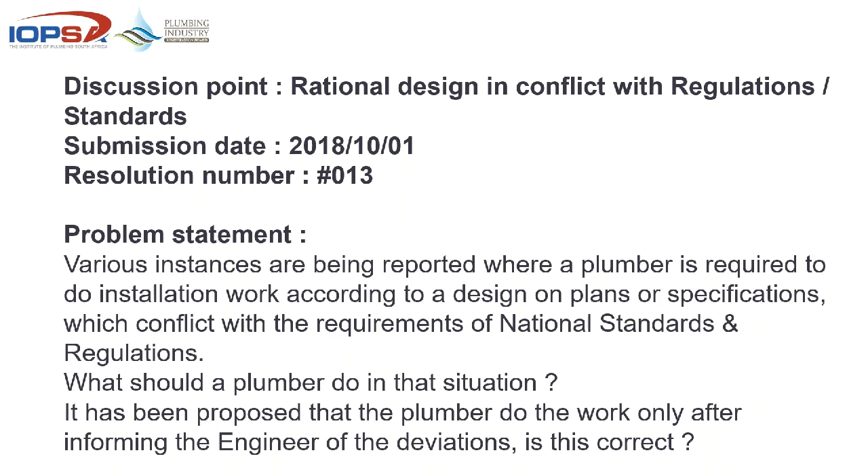So let's have a look at this problem statement. Various instances are being reported where a plumber is required to do installation work according to a design on plans or specifications which conflict with the requirements of national standards and regulations. What should a plumber do in this situation? It has been proposed that the plumber do the work only after informing the engineer of the deviations. Is this correct? So let's have a look at what the requirement was.

Can a plumber be allowed to do a water supply or drainage installation in accordance with a rational design without verifying that it complies with mandatory national standards and regulations? Should a plumber be required to evaluate a rational design and inform the engineer of any discrepancies regarding the mandatory standards and regulations? And are there any deviations that could apply?

If I could just pause on point 2 for a second - you'll find that most competent engineers would be able to work out or do calculations on water to the last drop, could be on any subject, but the point is that they're not a plumber. The standards and regulations that we look at are something completely different to what they study and apply in their everyday trade. So please note, this is not bashing an engineer or an architect or whatever. This is something we need to consider when you do bigger jobs, more complex dwellings, or a triple-story house that needs plumbing done.

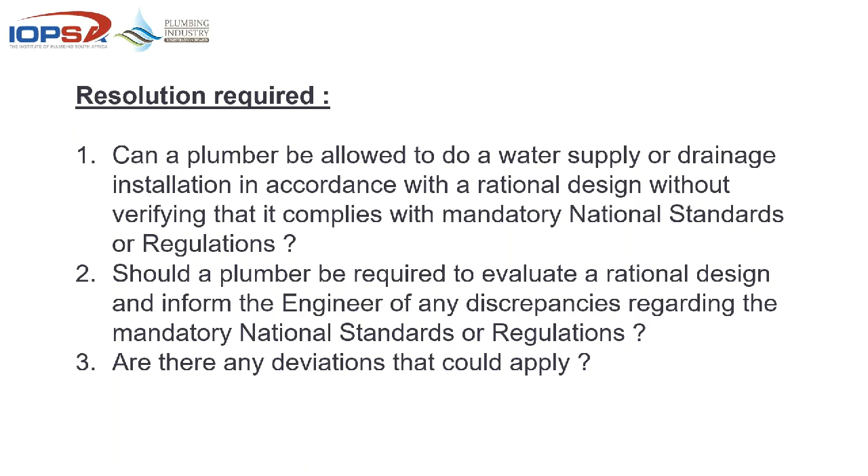Bear in mind that the engineer and the architect studied in a completely different field than what you did, so sometimes we just need to touch base and make people aware of what's actually happening. When it comes to reference documents and standards, we're going to go to the National Building Regulations, Part A, P, W, and XA from the one document, and then we look at 10252 Part 1, Part 2, 10254, and 10106 briefly.

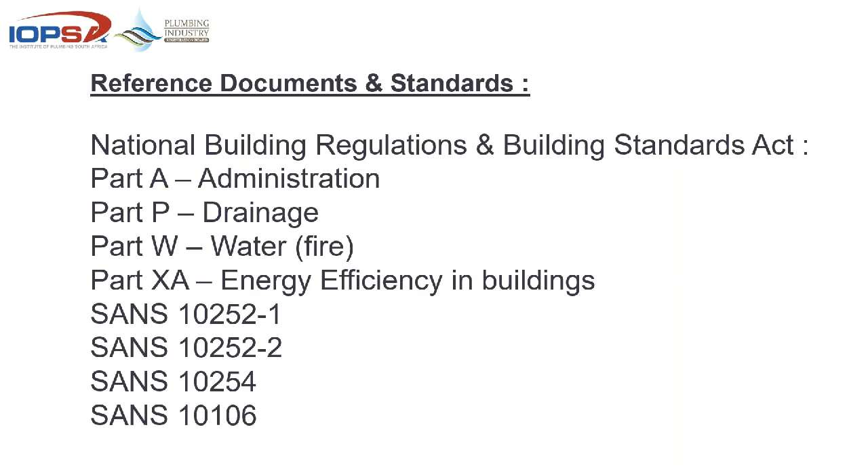When we look at Part A of the application of the National Building Regulations, it says that the requirements of the National Building Regulations shall be complied with by adhering to the requirements of all prescriptive regulations and satisfying all functional regulations by adopting building solutions that comply with the requirements of the relevant part of 10400. So in any of the above ways, you can actually just say that whatever's being done comes straight from the book, and that's how we get to it, and that's what was done.

The other option is reliably demonstrating or predicting with certainty, to the satisfaction of the local authority, that an adopted building solution has an equivalent or superior performance to a solution that complies with the requirements of that relevant part of 10400. We've all heard the term that a rational design needs to be equal or better than the actual standard. You can't be worse off.

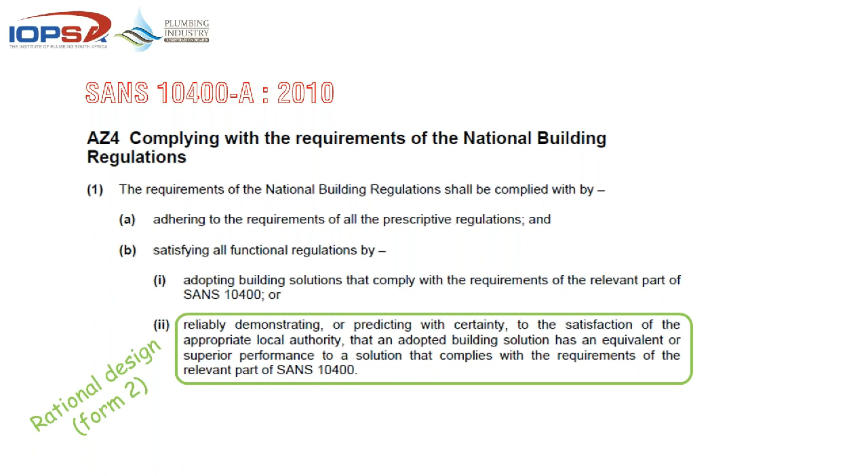So for that rational design, the engineer will get appointed on a Form 2, submitted to the local authority, and this being the first part of what was done beforehand - not once the job has turned out to be something no one can sign off, and you run to an engineer.

Not going to worry about the definition, but basically architect, engineer, natural science or geologist as we know them - there's a requirement for all of these guys that if they are registered in that category, they can do these designs and assessments. I'd like to point out point 3: an approved competent person who satisfies the requirements of sub-regulation 1, which we've just read, in terms of sub-regulation 1(b)(ii), in respect of a system - in other words something, drainage, water, fire, whatever system, measure that was put in place, facility, parameter, or installation.

And here comes the crunch - shall inspect and certify upon completion, in accordance with the requirements of A19, the construction, erection, or installation thereof.

As far as the local authority is concerned, that is basically a Form 4. He signs a document to say that the system or the whole design, the rational design that he did, has been inspected, and he'll certify upon completion that it actually complies with the requirements of what he designed. So it's not for the plumber to get involved with that at that stage.

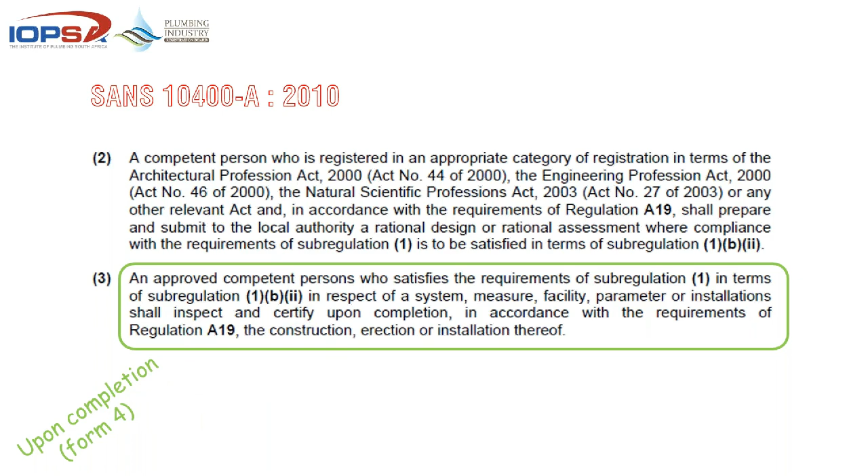Important to note, while we're in Part A, when a building plan is submitted you've got 3 options as far as drainage is concerned, bearing in mind that water comes from 10252 Part 1. So as far as the building regulations are concerned, the architect or the competent person submitting the plans have got 3 options. When you submit, you tick the box that says yes, it's in accordance with the detailed requirements of 10400 Part P. In other words, everything in Part P that we're supposed to apply, that design is in accordance with all the detailed requirements. So you tick that box, everybody's happy.

The next option he's got is to say that his whole design of his building is the subject of a rational design or a rational assessment, or both. In other words, he couldn't get it to work according to 10400 Part P. He needed some gimmicks, or some relaxation of distances or sizes or whatever, and then he'll tick that box.

The last one, the Agrément Certificate, is for stuff that's not on, or there's no national standard for, so it's specialized. Even with that, when you tick that box, it means that if you're using a product with an Agrément Certificate, not only do you have to use that system or product as it was tested, but some of these even go further to say you have to have been trained by that manufacturer or supplier to apply it, and any deviation from the original approval granted on that certificate would make that application null and void. So it's not straightforward, but basically those are the 3 options for satisfying the regulations.

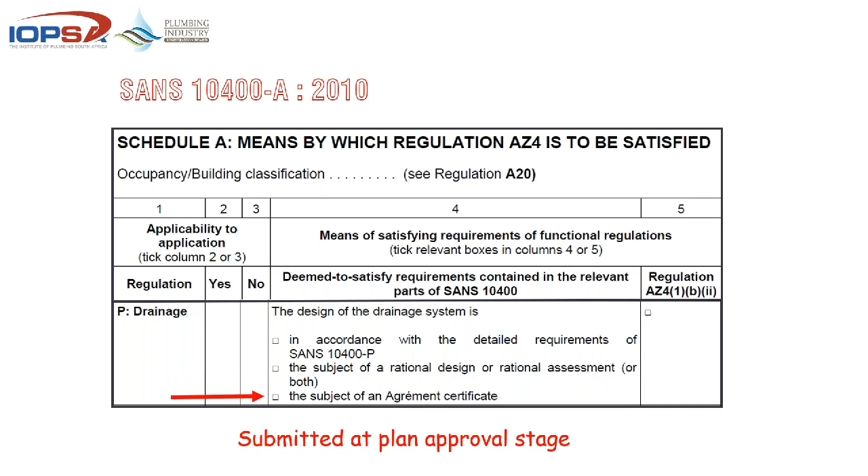Then we quickly dip into 10400 Part P, and that tells you very clearly that a competent person for sanitation, the one that will sort out your drainage hassles, is registered in terms of the Engineering Profession Act as either a professional engineer or an engineering technologist. He or she has a tertiary qualification, a degree or diploma in either civil or mechanical engineering, and is generally recognized as, or can furnish acceptable proof of having, the necessary experience and training to undertake rational assessments or rational designs in the field of sanitation.

So when you look at 10400 Part P, you'll notice there's no architect, no QS, no project manager, no client, no one else deemed competent other than an engineer, professional engineer, or engineering technologist, that can do that type of design.

And for the guys that haven't had a look at the drainage presentations, a rational assessment is an assessment by a competent person of the adequacy of the performance of a solution in relation to requirements, including as necessary a process, calculation, consideration of accepted analytic principles based on a combination of deductions from available information, research, data, testing, and service. That design may then include calculations, which may include a design based on a standard or other suitable documents.

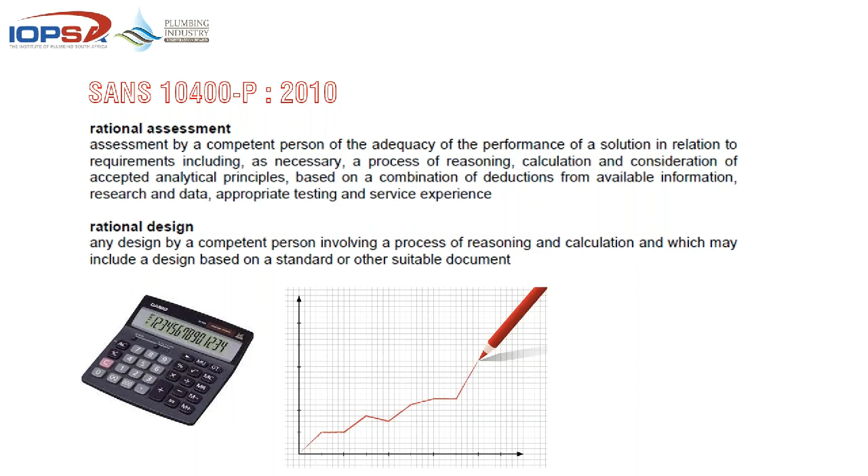Then we run to 10252-1 of 2018. You'll see that when you get to 7.8.1.1, any fire installation or combined installation shall be the subject of a rational design. There's about 10 or 15 pages you can skip, and right at the end of it all they tell you that a rational design is required for any fire installation or combined, being domestic, potable and fire installation.

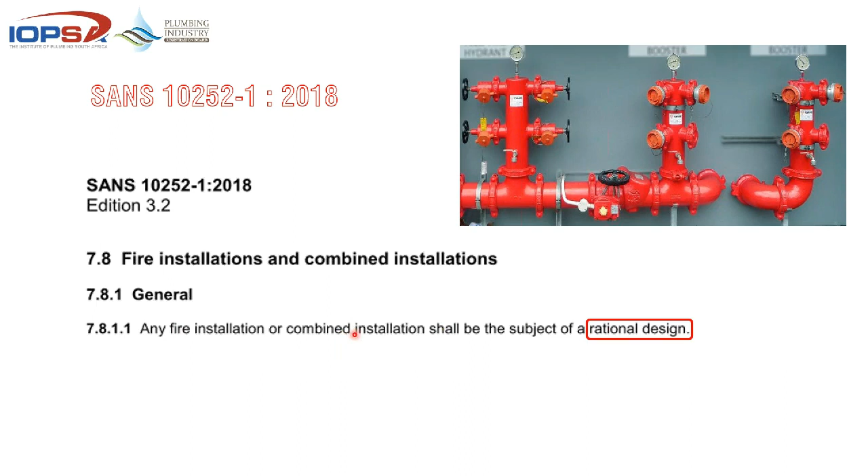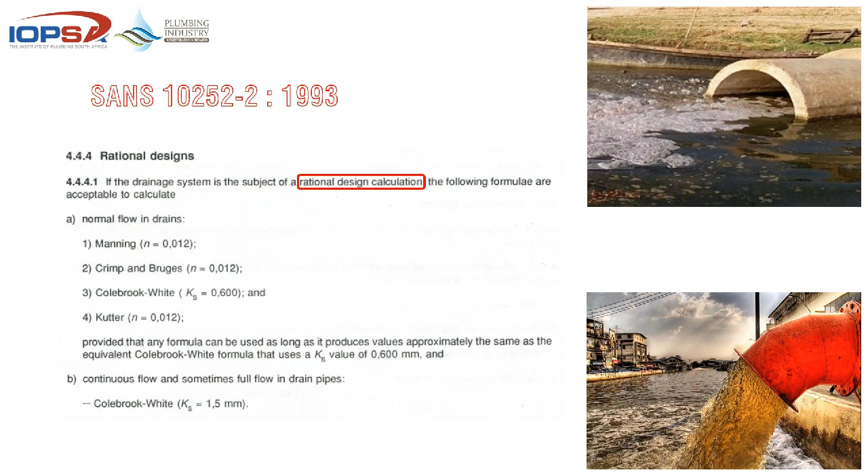SANS 10252 part 2 of 1993 says that if the drainage system is the subject of a rational design calculation, the following formula is acceptable to calculate. That would be as far as the hydraulics are concerned, not access, not length of pipe under the building that you can't get to. It is simply, if you look at these, the following formula: normal flow and continuous flow, sometimes full. These are all hydraulic related, but a rational design calculation can be accepted by the local authority.

10254: where some of the provisions of the standard cannot be applied, the installation shall comply with the details in a rational design developed by a professional engineer on acceptable installation drawings, and that rational design shall not compromise the safety and performance principles incorporated in the standard. So with 10254, you have the option of a rational design, subject to it not compromising safety.

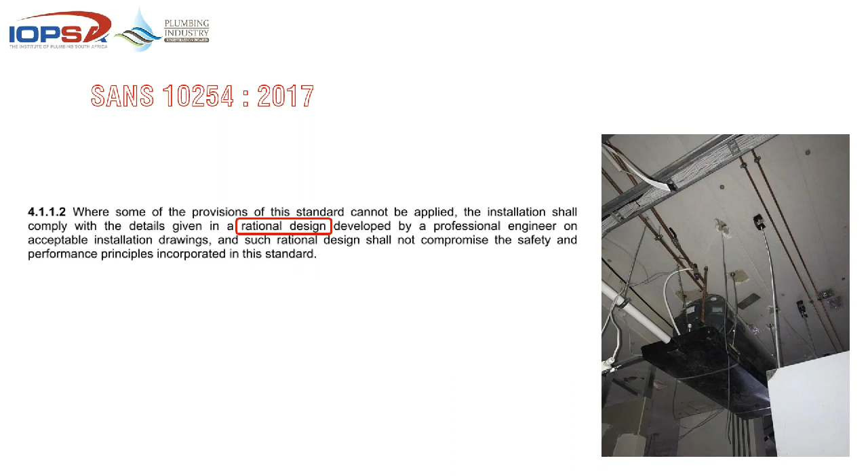10106, the whole theory behind the collectors before an installation: an assessment of the roof structure that will support the system and its related loads shall be carried out by a competent person. If there's a problem, deemed-to-satisfy designs in Annex B give you those roof truss details with the necessary supports, but they're limited up to and including 250 litre systems. Larger systems will require a design assessment by a competent person.

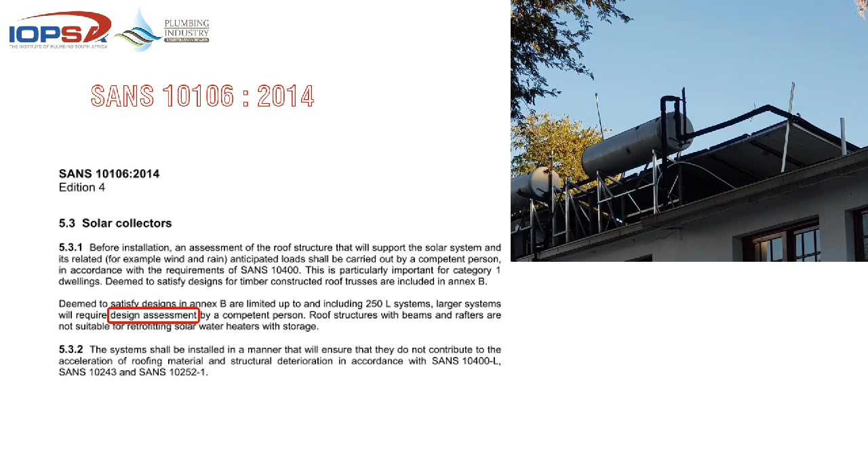So having looked at all of those standards, which give you the option of getting a competent person in to do the bidding for you, the reasoning we went through was the following. The standards do allow for competent persons to do rational designs on complete systems and components of systems, as you saw. However, these must fulfill the functional requirements of the actual regulation. The National Building Regulation is clear that only the competent person may sign off on his own rational design. Very important.

The application or submission that the competent person does to the local authority includes proof of PI cover.

I saw one yesterday where the engineer's PI cover was up to 20 million rand per claim. So if he does a design and something goes wrong and they need to redo it, or fix it up, or break a building down to get it sorted, he's got 20 million rand per claim to cover that. I don't know of any plumbers, myself included, that have that type of PI cover. So it's very important that only the competent person may sign off on his own rational design.

However, should a plumber be required to issue a COC for other purposes, for the whole job, or the local authority wants a COC for the plumbing in the building, in the event that some part of the rational design is not in conformance with the regulation, such as specs or materials, the plumber should have given written notice to the responsible person or principal for that site of such non-compliances. If this had been done, and he has retained proof of these notices, he has indemnified himself and may issue the COC that certifies.

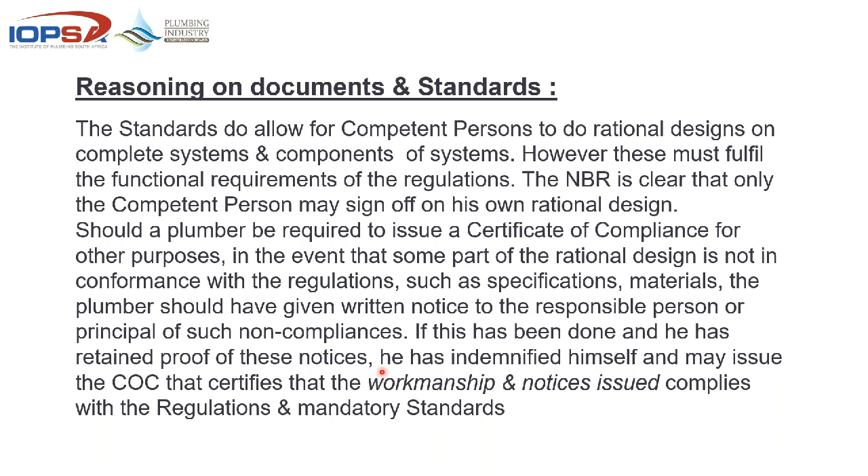So you don't walk away from the job saying you'd rather lose this job than do it, but you need to have notice issued to these people that states your workmanship and your notice are then actually compliant.

The consequence of non-compliance: if the written notice, it could be an email, letters, minutes of site meetings, anything like that, of non-compliance has not been issued, and you issue a COC stating that his work is compliant with the regulations and standards, he may be legally liable for damages and rectifications. It may also result in invalidation of warranties, exposing him to further claims.

So as you can see, the main gist or main thread throughout this whole thing is that you have to have proof that you've actually notified the owner or his principal agent, be it the architect or the engineer on site, that there is a clash, and once it's been minuted and you've notified them and they've not rectified it, then like the previous slide says, you're responsible for what you do.

The resolution taken is that the plumber is obliged to give written notice of points where the regulations have not been complied with in rational design, spec of material, etc., to the responsible person. It is the resolution of the TAC: where the plumber has complied with the requirements of notifying the owner or his appointed agents of the non-compliance prior to signing the COC. He cannot be held responsible for work done as instructed. The COC certifies that the workmanship and the notices given are in compliance with the regulations and mandatory standards. It does not certify that the installation then suddenly becomes compliant. I hope that clarifies that matter.

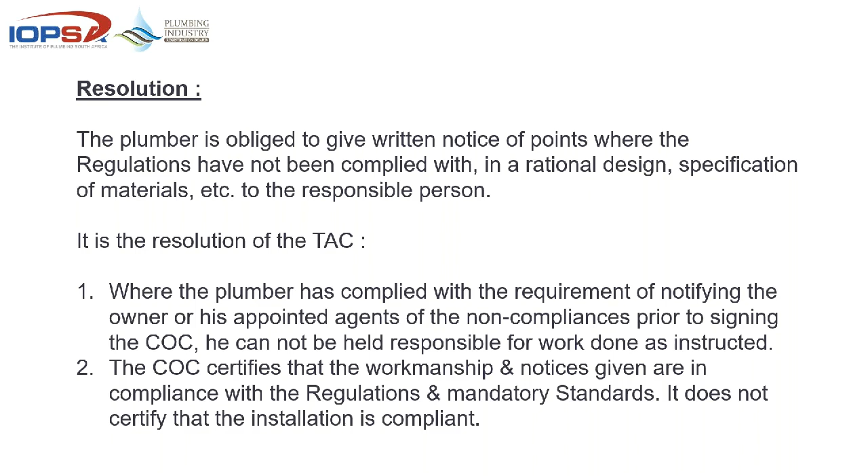Have we got any questions? All right, we do have a couple questions here. The first question reads: how involved with the development need to have these documentations and inspections?

Sorry, just run that by me again. All right, I'm going to read it again. How involved with this development need to have these documentation and inspections? I'm not clear on that question. How involved?

All right, so I'm going to move on to the next one. The next question reads: if a drainage or sewer goes under a building, what is the size of the concrete encasement needed? I have had various sizes issues.

As far as encasement of drainage goes, I think that most local authorities gave up on that when we started getting proper UPVC drainage pipe. If you cast your mind back, the encasement of pipe was around earthenware pipes and fiber cement, well, used to be asbestos, something that was brittle or something that could break under the building. By encasing a PVC pipe, you're actually doing more harm than good, because with a bit of flexibility on that PVC, there's nothing that can happen to that pipe under the building other than a bit of lateral movement or movement sideways. Once you've encased it, you've basically given up on that option.